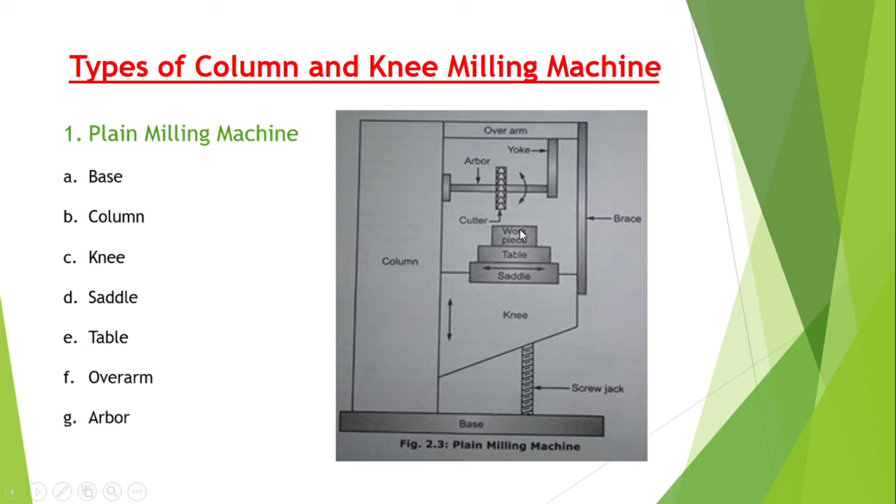The second type is vertical milling machine. Same as the vertical machine, in this machine the cutter is mounted vertically, so it works vertically. It has the first part, same as before, which is a heavy cast iron casting at the bottom of the machine. It carries the column at its one end, and also serves as reservoir, same as our plain milling machine.

The second part is the column, same as the plain milling machine. It is a vertical column, and it carries all the front guideways. The third part is the knee. The knee is mounted on the front face of the column and can slide in the vertical direction of the guideways, same as the plain milling machine.

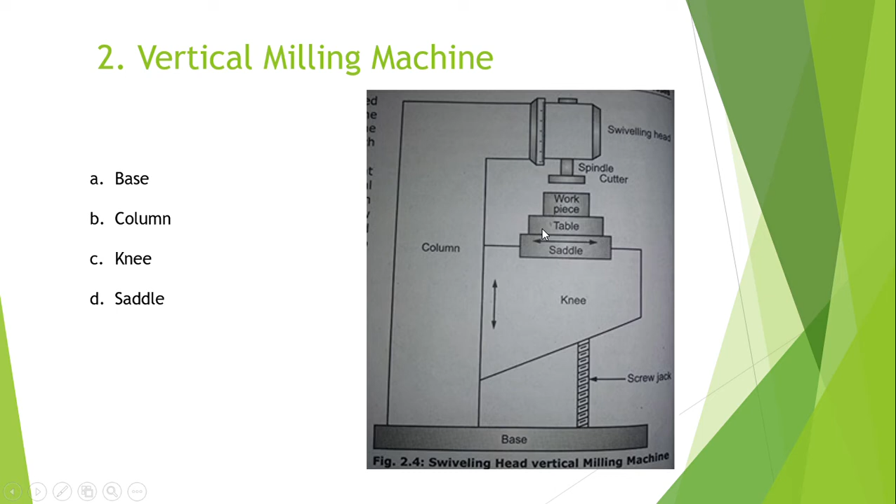And the saddle, which works to give support to the table, and also give movement to the table. And the table, which is mounted on the saddle, can be moved in the longitudinal direction, and the table provides T-slots to hold the workpiece.

And the head, which gives extra support, is attached to the column, and the head can be swiveled in the vertical plane parallel to the front face of the column. This extra feature helps to machine a taper surface, giving the desired angle for the taper operation.

So same as the working, the workpiece is mounted on the table and can be moved in three directions: vertical by moving the knee, longitudinal by moving the table, and crosswise by moving the saddle. The milling cutter is mounted on the vertical spindle and rotates about the vertical axis at high speed, and by the rotation of the cutter, the cutting action takes place.

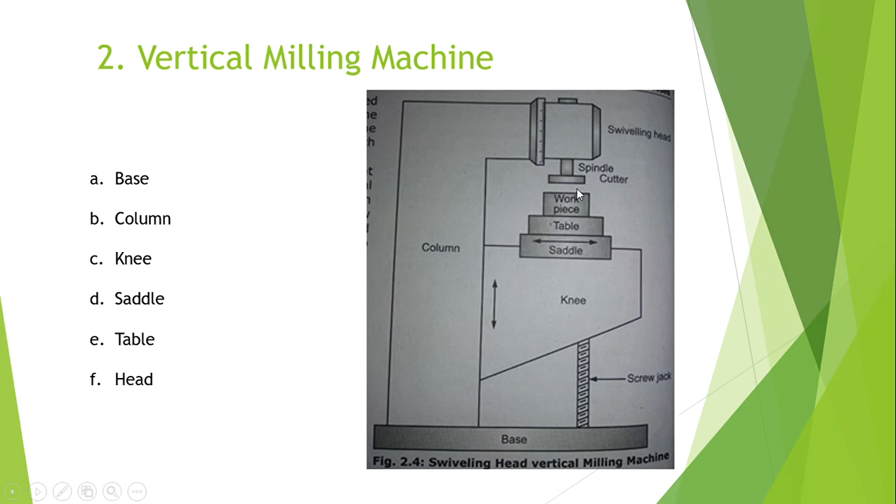The third is the universal milling machine. Same as the plain milling machine, in construction it is almost the same as the plain milling machine. The universal milling machine is the most rigid and sturdy milling machine, and it can accommodate heavy workpieces.

It is used for gear cutting, or you can say for producing spur gears, drills or reamers, with this kind of milling machine.

The first part is the base, placed at the bottom, which gives the main support. The second is the column, which is the vertical support, and it provides support to all the accessories like saddle, table, supported by the knee. The knee, mounted on the front of the column, is operated by the elevating screw provided below the knee, and the saddle gives the cross direction to the table.

The table gives support to the workpiece, and the T-slot holds the workpiece, and the circular guideways provide a top surface so that the table can swivel in the horizontal plane about 45 degrees on both sides.

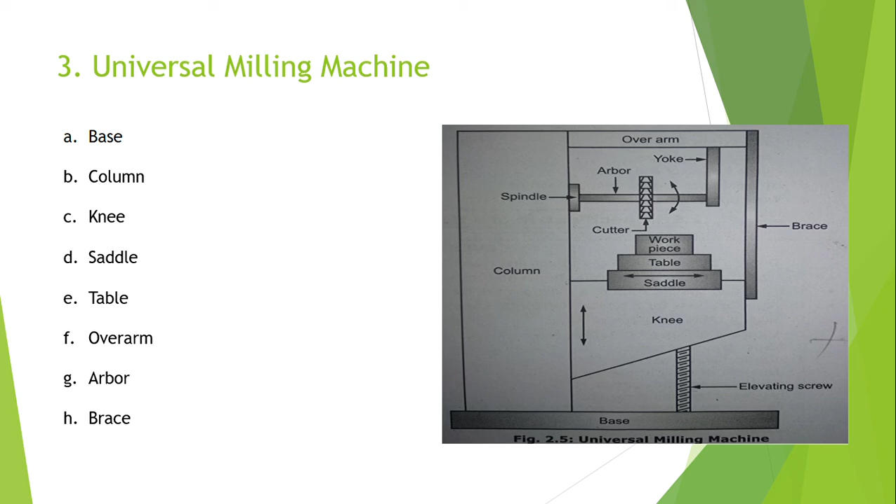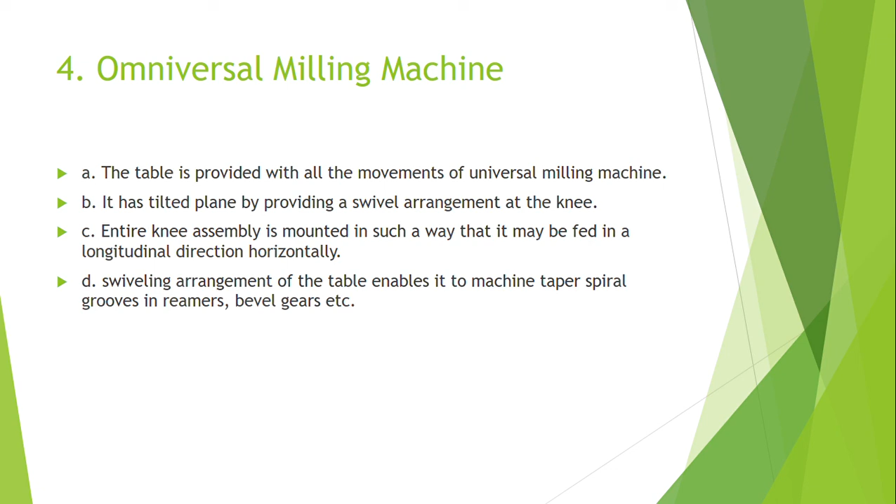The last one is the omniversal machine. The table is provided with all movements of the universal milling machine. It has a tilted plane providing swivel arrangement at the knee, and the entire knee assembly is mounted in such a way that it may be fed in a longitudinal direction horizontally, and the swiveling arrangement of the table enables machining of taper spiral grooves in reamers, bevel gears, etc.

Now whenever you are purchasing or manufacturing this milling machine, the column and knee type, there are some specifications taken into account. The first is table dimension, table travel, and distance between the cutter and workpiece.

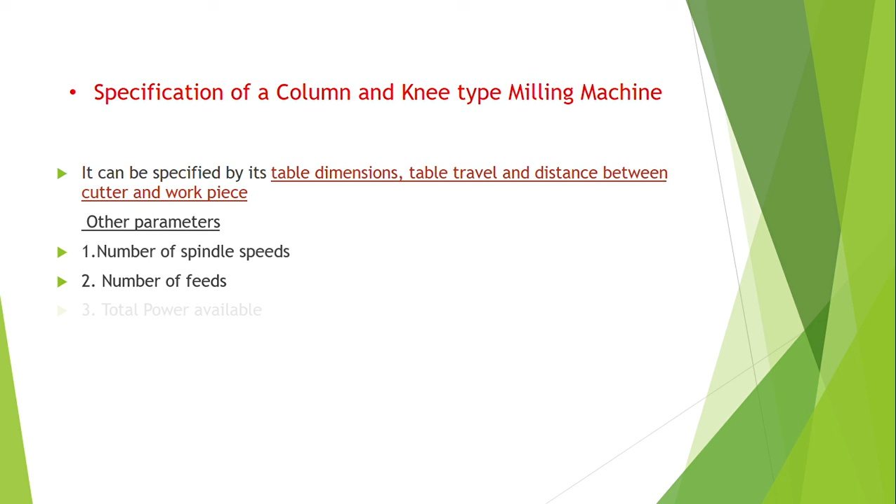Other than this, some extra parameters taken into account are number of spindle speeds, number of feeds, total power available, spindle nose taper, horsepower of the motor, approximate weight of the machine, and floor space area required. These are the other parameters taken into account as specifications for manufacturing or purchasing the milling machine.

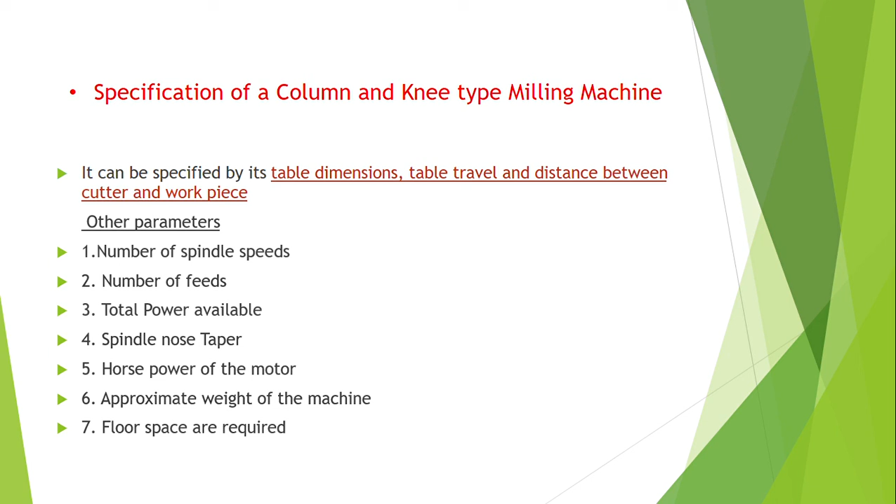So a question might be asked: write down the specification of the column and knee type milling machine. So these are all the components. In this session we have covered the different types of column and knee milling machines, their types and specifications, and we will also cover the specifications of the column and knee type milling machine in detail. That's all, thank you.